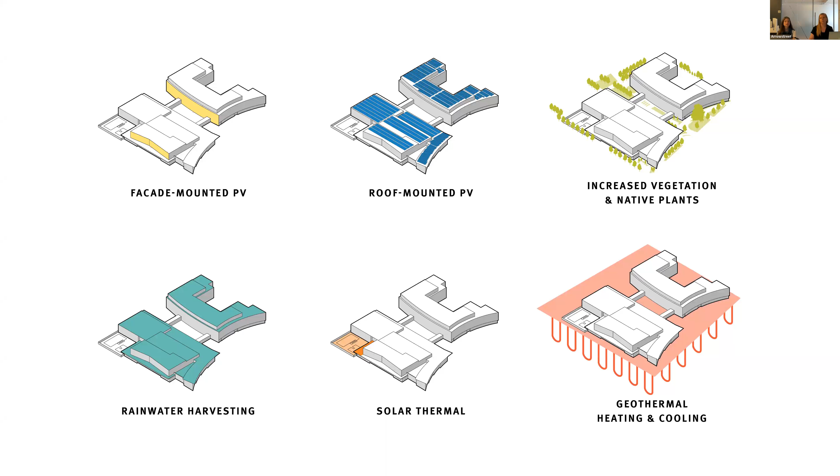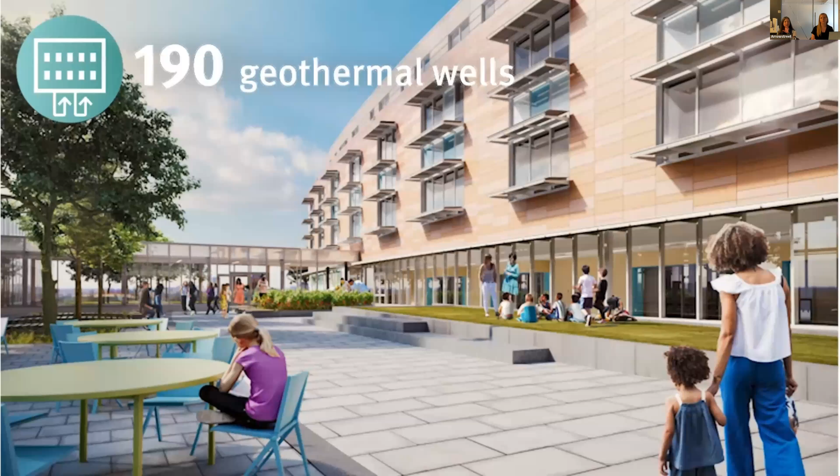We're just going to look at a short video here that shows you what that overall building looks like. This project is about 273,000 square feet and has 3 schools: an elementary school, a middle school, and a preschool program, all uniquely separated in the space, with shared spaces like gyms and cafeterias. There's also a public library, a public pool, and the district administration for the Cambridge Public Schools. So there are a lot of components throughout the building, with a strong focus on community and learning.

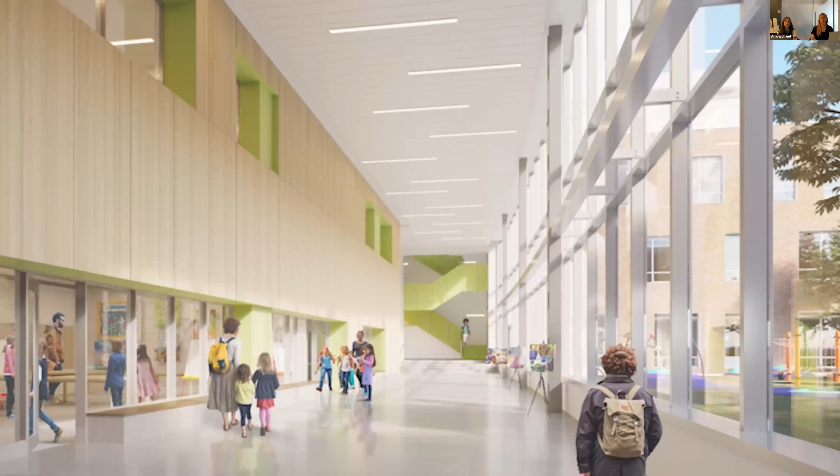So the graphics are really important to understand how we can incorporate them, as Jen mentioned, into the architecture so they are part of the building. Also understanding maintenance and how things might change over time, so how can we incorporate that to really enhance the learning environment.

This gives you a little bit of an overview of the project and the different spaces throughout the building. There's also a large public art component, as you saw the yellow piece hanging in the cafeteria. There's site artwork as well as artwork in the building that we really wanted to incorporate through the graphics and through the project as well.

As Kate mentioned, integration is really important in making sure that where we're placing these graphics really makes sense. So it's important to get your graphic designer on board early, to start these discussions early in the project with the architects, interior designers, and the client, and to identify spaces that will make sense for the graphics. You don't need to know all the details yet, but designating these spaces early on is really important to help coordination and make sure nothing else gets placed in these areas.

Building on that hierarchy of information, in addition to the large wall graphic, there's a small plaque next to each one that gives more detailed information, so students can come up and read more detailed information on the wall graphics.

The information on each of these plaques is written in the same way, with the same order of information, so that anytime you go to one of these graphics, you're getting the same pieces of information. It's also organized in a way that helps both young learners and adults read and get information out of it.

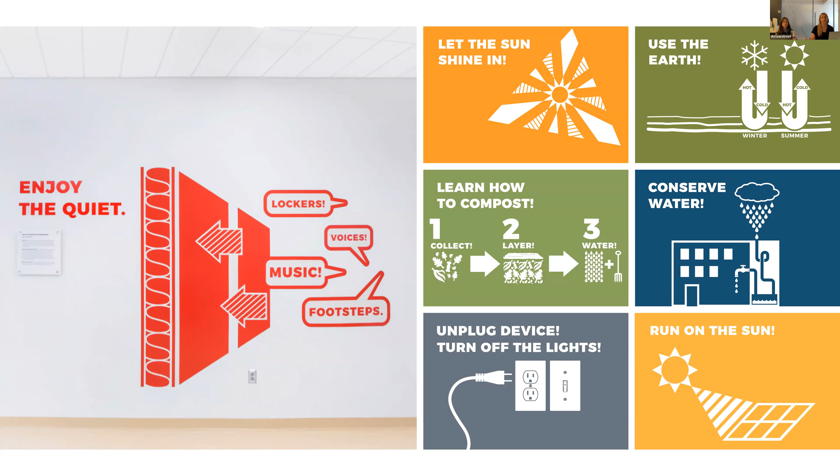Again, with placement, putting things where people can actually take action is very important. So here in the cafeteria, next to the area where students separate their trays at the end of their meal, we have a graphic about composting. At that moment of decision where they're making the choice to throw something away or compost it, we have that graphic there educating them on the importance of composting and how that happens.

Jenna was showing you a lot of the more fixed or stationary graphics throughout the building. We've also incorporated them digitally. Throughout the building, in spaces like the schools, the community area where community can rent and use the auditorium and gyms, and also in the public library, there are large dashboards that incorporate a lot of the same graphics and information. So if someone isn't walking through every grade level of the school, they still have access to that information. It can also be pulled up on a tablet or other ways, but when they're in the building, there are also these digital boards, really trying to make that connection graphically between all of those pieces.

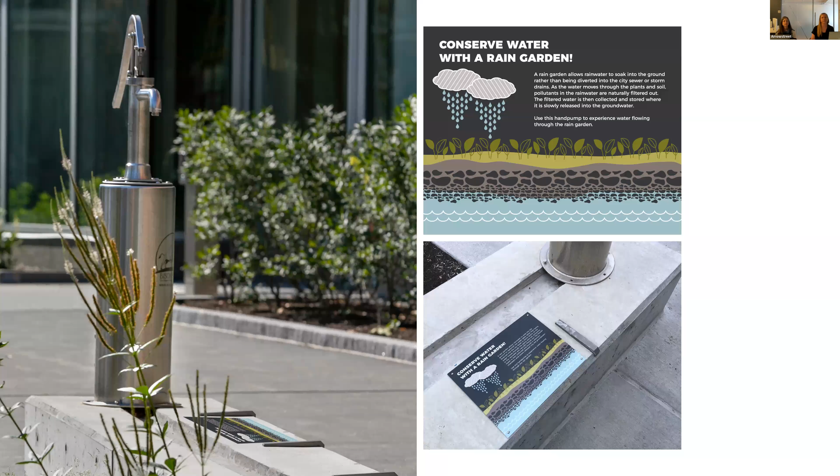Again, here in the courtyard, an area where obviously kids come and play a lot, but we do have the rain gardens here in the back. Next to these rain gardens, we have a very similar plaque that talks about what it is, what is done specifically at this building, and what can you do to take this home. Always bringing that user engagement and making sure people know how they can apply these principles to their everyday lives.

One of the other projects we wanted to share is a project that opened last fall, the Douglas and Gates Elementary School, also known now as the Boardwalk Campus. It's in Acton, for the Acton-Boxborough Regional School District. This particular project is actually quite similar to King Open in that it houses multiple schools in the same building - there are 2 elementary schools here as well as a preschool. So again, there are lots of different components happening in the same building, which we see more and more with buildings like schools and other community-focused buildings.

This particular project is also net zero energy and net zero water. Those were 2 large components that we wanted to talk about, or that the district wanted to talk about, in terms of the educational components and the graphical components.

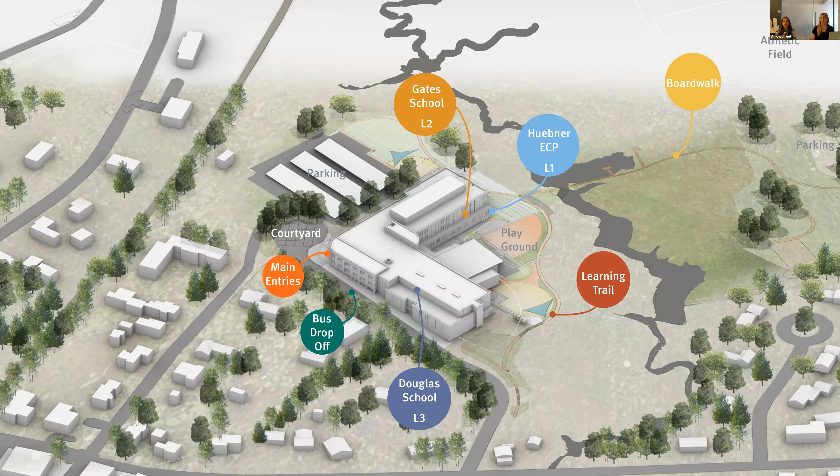Biophilic design was really important for this project, especially incorporating that ecology and the wetlands behind the school. That inspired the way that both the graphics are, which Jenna will talk about in a second, but also the way that the interior material palettes were set up as well.

So borrowing from some of the seasonal characteristics and colors, the 3-story school is basically designed with the first floor as the ground level, the second floor more green representing the tree canopy, and the 3rd floor blue, reminiscent of the sky. We really tried to inherently put the piece of the design that we're pulling from the land and the surrounding context through the building, both architecturally and graphically, merging those two together.

At Douglas and Gates, there is a very large signage program that supports and highlights all of these sustainable aspects of the building. The graphics go inside, outside, and cover a large range of topics. We wanted to make sure that all of the signage really felt like it belonged, so we created this system of icons and a graphic style to carry through all of the signage throughout the building so that it all felt of the same nature, even though it was vastly different content on each of the different signs.

Collaboration was also key in developing all of the signage here. The signs you're looking at right now are in the landscape. We worked with the landscape architects to understand why they chose the plants that they did. Ultimately, we decided to showcase the plantings in the 3 different uses that they have: plants as medicine, plants as food, and plants as filtration for that very important filtration system as water flows into the neighboring wetlands.

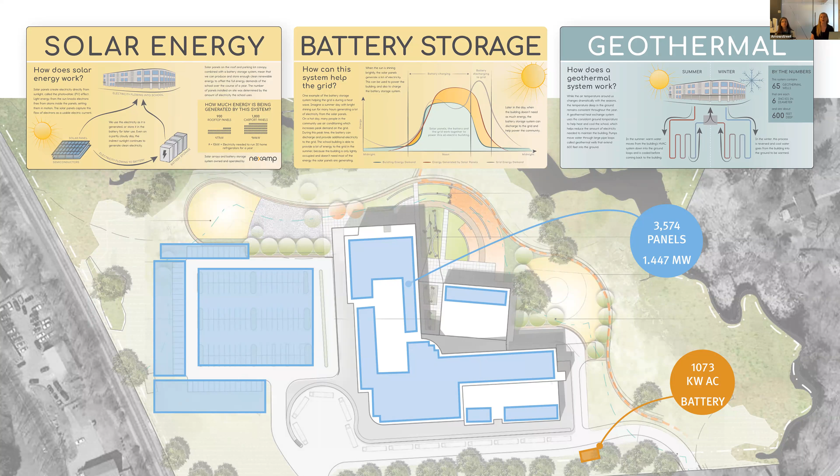With all of these signs, especially on the exterior, we're trying to find a balance between explaining how the general system works, giving general information about how geothermal and solar energy systems work, and also giving statistics on the actual project itself — how many wells were drilled, how many solar panels there are — so you have that connection back to the actual school.

As Kate pointed out, the wetlands were extremely important to this site and are an extremely important teaching tool for the school. So we have a series of plaques in the wetlands that students can read, and while they're connecting with nature, they can get this information.

You'll see too that a lot of the themes of the wetlands are brought into the building as well. I'll just point out on this slide, since I forgot to mention this on the overall aerial of the building, you can see that snake-like roof structure at the bottom of the page.

There was an existing boardwalk that we were able to widen and expand with more accessibility, on the same footprint. This is a community path that teachers, staff, and students use throughout the day, but also the community uses it to walk from one side to the other side of the brook.

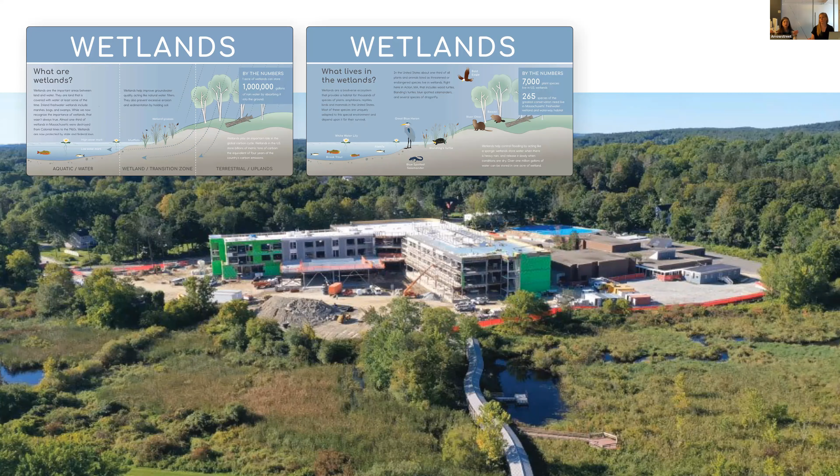That was an existing, really important feature that we kept and were able to enhance through graphics. Jenna will talk about this a bit more on bringing that to the community. When you exit the boardwalk toward the school side, there's a learning trail that goes all the way around the school building, connecting all of these components of graphic signage on the outside.

As Kate was saying, this boardwalk is very important to the community, so we wanted to add signage to it, and we decided this would be a great way to get the kids involved. The fifth grade classroom studied the flora and fauna of the surrounding wetlands, and they picked a handful of different flowers and trees to illustrate.

We took these illustrations and turned them into plaques that are now integrated into the structure of the boardwalk, so as they walk down, they can see their contribution to the project mounted on the boardwalk. They also wanted this to be a living project that continues to grow and evolve with the students.

We also used the natural flora and fauna as identification for each of the school classrooms. We worked with the director of the science curriculum to identify what plants and flowers, animals and insects, each grade level was going to be studying that year.

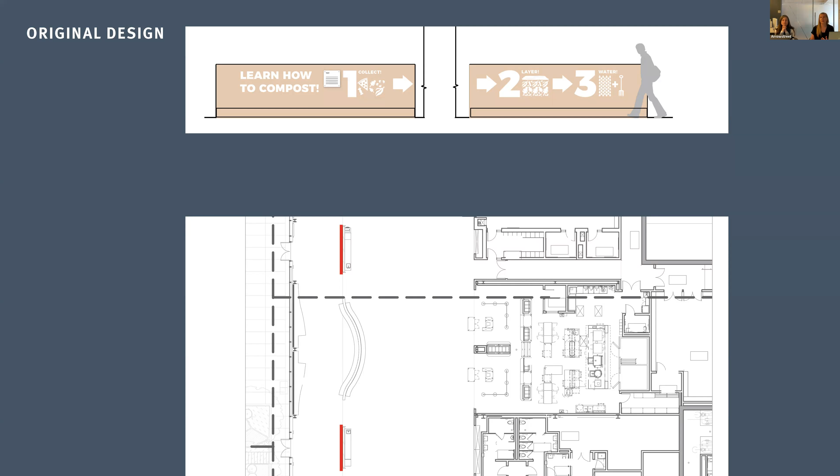But since this graphic had already been fabricated, we wanted to find a space for it. So we looked at all the other wall surfaces and found a wall over in the cafeteria above this window. With very minor adjustments, we were able to install it all as one graphic in one space and make use of what had already been produced and designed, which we really wanted to keep as part of the overall scheme.

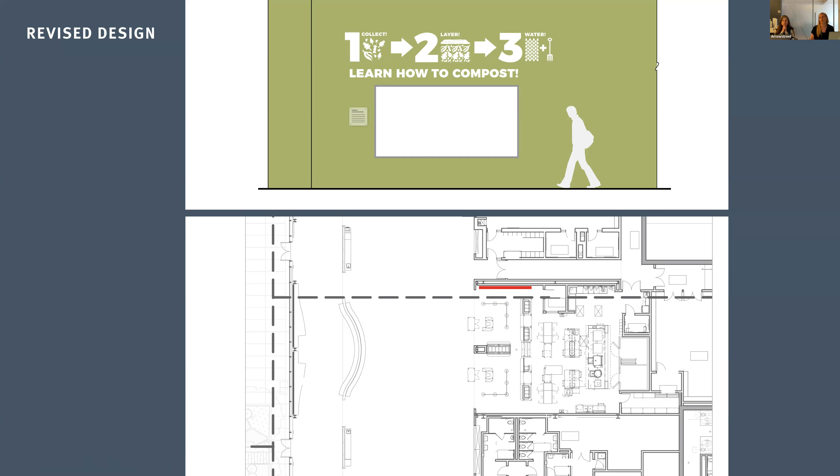This one is important: make sure your walls are prepped properly. A lot of what we do is wall coverings on drywall, so making sure those walls are properly prepared is very important.

All your walls should have a level 5 finish, meaning they're super nice and smooth, properly sanded and cleaned. Making sure you have 2 coats of primer and 2 coats of paint is very important. Getting that drywall sealed is important for the adherence of the wall graphic, and the paint needs plenty of time to cure. If the paint doesn't cure properly, you can have a lot of problems with the wall graphics not adhering to the wall.

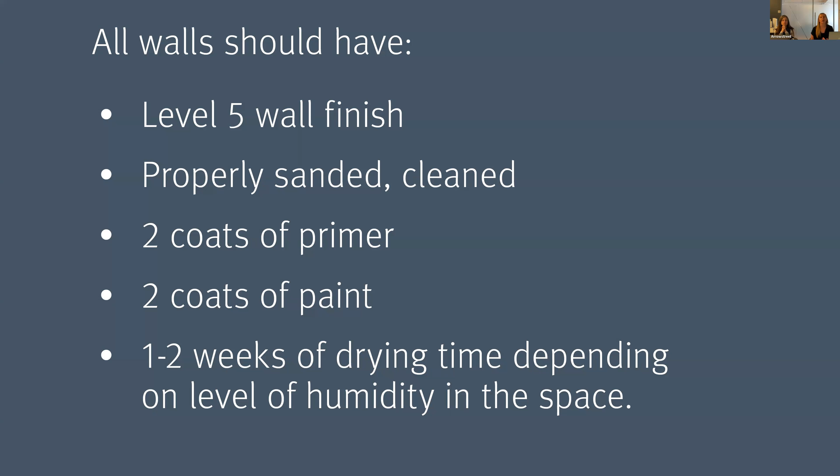If using low VOC paint, make sure you're allowing extra drying time. When low VOC paints first came out, there was a lot of debate, and a lot of installers wouldn't install graphics over them. It is possible, it just needs extra drying time, and you need to clean the walls with a solution of alcohol and water to make sure you have the proper prepping.

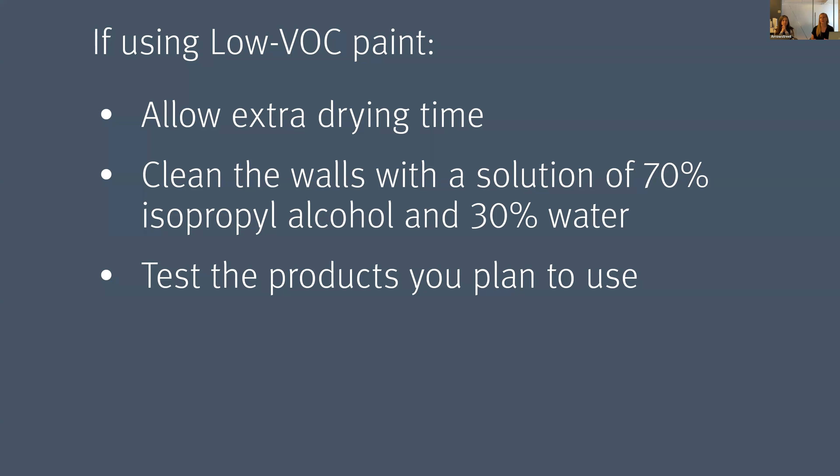You should also test all of the products. Most vendors do this now: you take a little corner of the actual film or wallpaper you're installing, put it on the wall in an inconspicuous place, and make sure it doesn't fall off and adheres the way you want. This takes a little extra time, but in the long run it's way better than having your graphics fall off the walls a week after you install them.

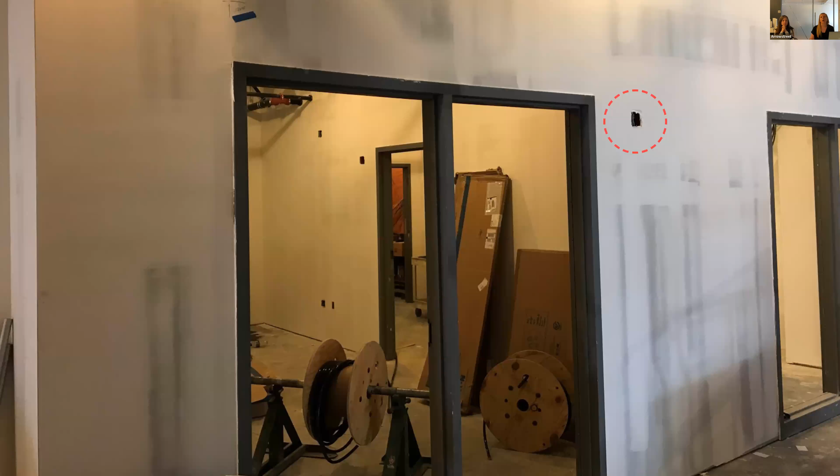Coordinate your devices. A lot of our wall graphics go on these big, beautiful walls, and the last thing you want is a fire strobe in the middle of your wall graphic, which is almost what happened in one of these schools here. This is a construction photo - we had a graphic planned for the space between these two doors going into the classrooms. When they were doing a site walk, they discovered there was a hole here, probably for a fire strobe or some device that was supposed to be installed there. Thankfully, the architect on the project knew there was a graphic going there, so they flagged it, brought it back, and figured out where that obstruction could be moved, so once the graphic was installed, it was a nice, beautiful graphic without that obstruction.

Here, the partnership between the graphic designer and the architect walking the space is very important. A lot of times, as graphic designers, we're not on site nearly as much as the architects are. So having that conversation and making sure they understand what those important spaces and walls are, so they can keep an eye out for things like light switches and other obstructions, and make those moves whenever possible, is very important. That's why, getting back to what Jenna said earlier, the sooner you can plan for graphics, even if you don't know what they are in terms of visuals, is really important, because then you can flag those things for the contractor.

On your plans, you can flag it when you're in pre-meetings with the contractor, so they know graphics will be going there. Sometimes things show up on walls that aren't supposed to be there, and they were supposed to be somewhere else. If everyone knows that ahead of time - because graphics tend to be one of those things where you have a budget but might still wait till the end, so you're finalizing designs when construction is starting, especially on a multi-year project - it's really important to have those flagged, with a dashed line on your elevations indicating the space is reserved for graphics, so people are aware of that in the construction field.

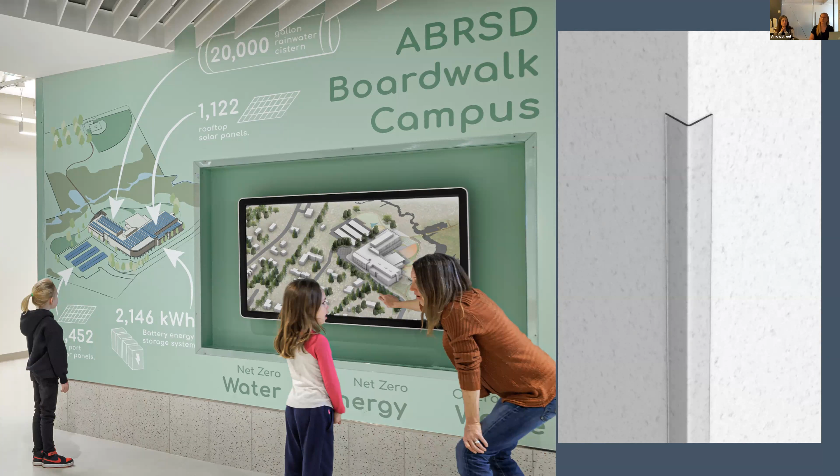And then finally, just be curious and have fun. A lot of these graphics came up because we asked why and how. It's a lot of fun to work with different people to help tell their stories. A lot of people love putting graphics in because it showcases their work in a way that normally doesn't happen. So ask questions, work with others, and have fun.

So, are there any questions? While we're waiting to see if anybody has any questions.

One other thing we didn't have in this presentation that might be useful to talk about is some of the materials, and as we're thinking more about sustainability, specifically environmental graphics, like what work you've been doing around that. Yeah, so a lot of what we do are wall graphics, which traditionally were always vinyl, which obviously we don't love in our projects.

More and more fabricators are coming up with non-vinyl wall graphic solutions, films that can be applied in the same manner. 3M has a great product now that can be used, and other smaller manufacturers are also coming up with very durable graphic materials that can be custom printed and installed in ways that really eliminate that PVC and vinyl from the project. There are even optically clear films now, which was kind of the big hurdle - making something you can print on to apply to windows. A lot of the window graphics, like we saw in Douglas and Gates, there are non-PVC versions of those materials now that you can specify, which is really much better than the traditional vinyl.